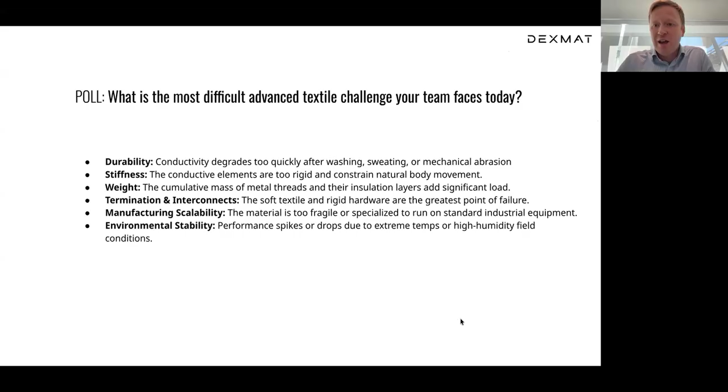Weight, the cumulative mass of metal threads and their insulation layers adds a significant load. Termination and interconnects, the soft textile and rigid hardware are the greatest points of failure. Manufacturing scalability. The material is too fragile or specialized to run on standard industrial equipment. Or environmental stability. Performance spikes or drops due to extreme temperatures or high humidity field conditions. So please take a moment to answer that question, and we can move on to the next slide.

So all those issues that we mentioned in the poll question are things that we think could be addressed by deploying Galvorn in these type of textile applications. Galvorn is a material that has an extraordinary combination of properties that is unmatched by any other material. Its electrical resistivity is 10 times lower than the best silver-coated nylon yarns, while at the same time having 17% higher thermal conductivity than copper at a tenth of the density of stainless steel, making it a very lightweight material. At the same time, Galvorn behaves just as any other cotton or textile thread and is 1,000 times more flexible than metal wiring.

And coupled with all this is extremely high strength, where Galvorn is comparable in strength to materials like Kevlar. It's also highly corrosion resistant, flame resistant, cut resistant, and it's recyclable, meaning we can take Galvorn that's been used and put it back in our process and make it into Galvorn with no loss of properties. Next slide.

DexMat has a highly scalable process for making Galvorn. The way this process works is we take raw carbon nanotubes, which come in a pelletized or powder format, and we dissolve the carbon nanotubes in a solvent. At very high concentrations, when we make a carbon nanotube solution, it forms a liquid crystalline phase, which basically means that the carbon nanotubes start to spontaneously orient and pack together with one another. And what you end up having is a polydomain liquid crystal.

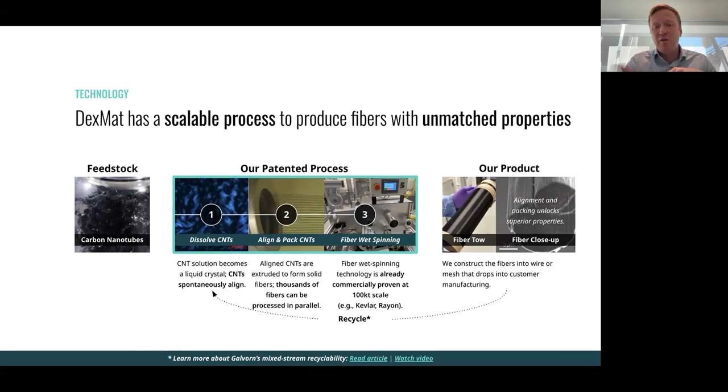As I mentioned, we end up getting a very densely packed fiber. You can see in the image on the right, a scanning electron microscopy image, the dense packing of the carbon nanotubes in that fiber. And as I mentioned earlier, we can take the fibers after they've reached end of life, put them back into our solvent in step 1 of the process, and recycle them to make Galvorn again with no loss of properties. Next slide.

Here, what we are showing you is just a portion of our production line, the collection point of the fibers. We can't show you the entire machine because it has some proprietary information, but this shows you the speed at which we are able to collect our fibers, which is actually faster than the production speeds used for things like PAN carbon fiber precursors. And if you go to the next slide.

Since we first started making Galvorn, we've increased our production capacity by a factor of 3000x while reducing costs by 99.6%. Today we're still at a relatively small annual production capacity of about 1/3 of a ton per year. However, because we have such a lightweight material, this translates to a pretty significant length of conductive thread: about 18 million meters of thread, about 150 microns in diameter, from this 300 kilogram per year capacity.

However, our goal is to get Galvorn produced in large volumes and at very low costs, on par with commodity materials like copper, aluminum, and steel. So we have an aggressive scale-up plan where later this year we're going to 10x our capacity and produce Galvorn at about 3 tons per year. Within the next 5 years, we anticipate building our first-of-a-kind commercial plant, which will enable us to produce about 3,000 tons of Galvorn in a single year. That translates to about 180 billion meters of 150 micron Galvorn thread.

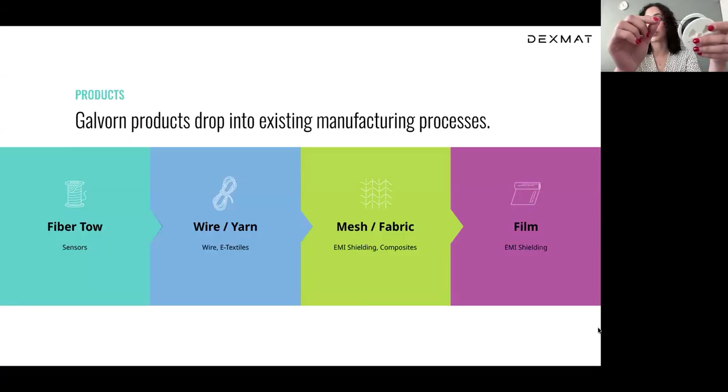We start with a fiber tow, which is the end product of the fiber spinning line that Dmitri described earlier. These are continuous single filaments that run parallel to each other, ranging from 30 microns to about 50 microns in diameter. Those are the ones we readily have available, but we can make them thinner or larger in diameter depending on what the application calls for. And we can take these loose tows and twist them to form twisted or braided yarns. This is about 0.5 millimeter in diameter.

We can make all the way from 17 tex to hundreds of tex in yarn. And the great thing about our yarns is that they can drop into existing manufacturing processes and equipment such as sewing machines, embroidery machines, knitting machines. And although they're not as stretchy as other typical textile yarns, they can still run very efficiently on these machines.

And I have 2 samples of some of these knitted meshes or fabrics. And the great thing that you can see here is that you can manipulate the physical properties of these fabrics. As you can see, this one is a lot more flexible and supple to the touch, and this one is a lot stiffer and more rigid. We can achieve this by either playing around with the construction of the fabric or playing around with the construction of the yarn. And we can also target any type of specifications with our yarns to reach a specific linear resistance based on what the application calls for.

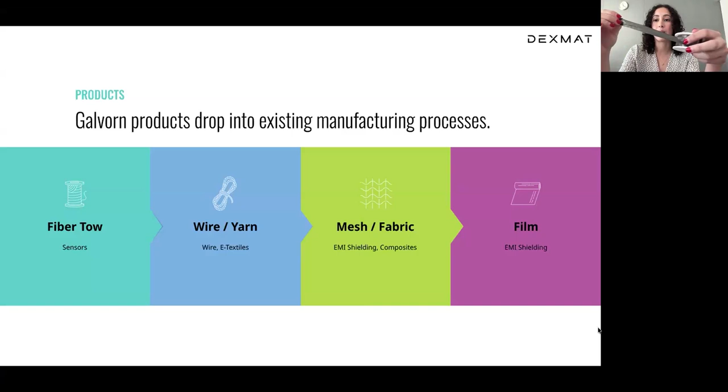And lastly, we have this ribbon-like, highly aligned film. We call it film or tape. This is still very flexible and very strong and electrically conductive. It's about 10 to 20 microns in thickness, and typically we make them in 1 to 2 centimeter widths, but we can go wider or narrower, depending, again, on what the application calls for.

So I'm going to cover some of the prototypes that we've developed at DexMat. This one was actually through a project that was sponsored by AFFOA in partnership with a company called Hexoskin. They make EKG vests and t-shirts, and they typically use these silver-coated fabrics that after multiple washes start to oxidize, and you get a degradation in the EKG signal. So the goal of the project was to assess whether Galvorn-based electrodes would have comparable performance in terms of EKG signal while also having that washing durability. And by the end of the project, we were able to prove that it does indeed provide reliable EKG signal while also holding up to multiple wash cycles without a degradation in performance.

Looks like we may have lost Sophia for a second. I think she may have gotten booted off the internet network, so I can continue talking through the slides while she tries to join back on.

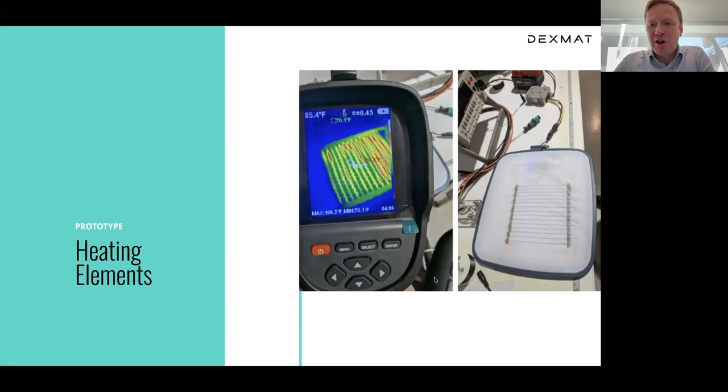So essentially, this is an application that can be used for heated jackets, car seats, etc., and requires a very small quantity of Galvorn to be able to generate the amount of heat that you would need for that application.

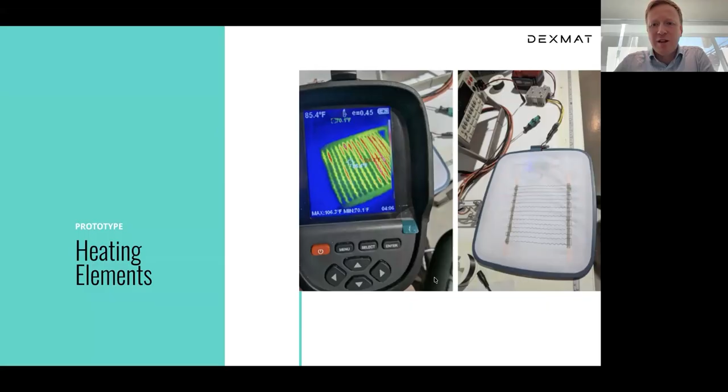You want to go to the next slide? I don't know if we can since Sophia's not there. Yeah, she was in control. I can share my screen. Sorry about the technical difficulties. One moment, I do have a backup deck. One moment, please. Can everyone see this one? Yes.

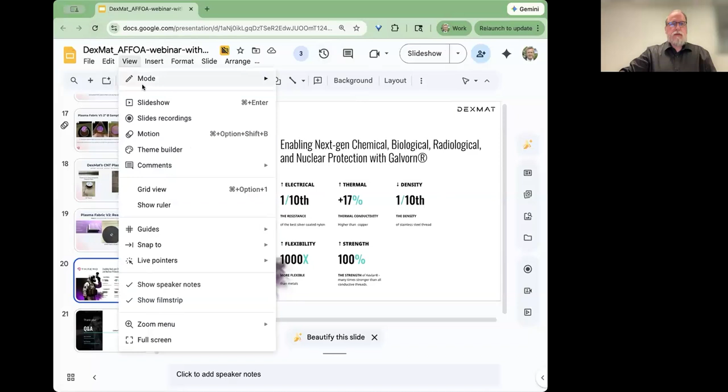Another application that is possible with Galvorn is based on the fabric form factor that Sophia demonstrated. And there's a wide range of different applications that are possible with this fabric form factor. One that customers have been pursuing is EMI shielding and signature management. And it looks like Sophia is back, so I'll pass the baton back to her, but I'll finish on the signature management. Essentially, if you have a vehicle that you're trying to hide in the field, or camouflage that you're trying to have on the soldier for protecting from being detected by radar, having a material that is able to shield from electromagnetic signals that is lightweight is highly important.

And is there anything else, Sophia, that you want to specifically mention around the signature management? Sorry about that. I think I lost connection for a minute, but no, I think you've covered it. Thank you for stepping in. Are you sharing right now? I am, yeah. Okay, just continue sharing. We'll move through the slides.

Another application that our customers are testing Galvorn for is lightning strike protection. Typically, traditional aircraft is made with aluminum, and of course, aluminum is a great conductor, so it can just absorb that strike and channel the current out through an exit point. However, more modern aircraft is being built with carbon fiber reinforced polymers, and carbon fiber is a poor conductor, so you do need an additional metal layer that can absorb and mitigate that lightning.

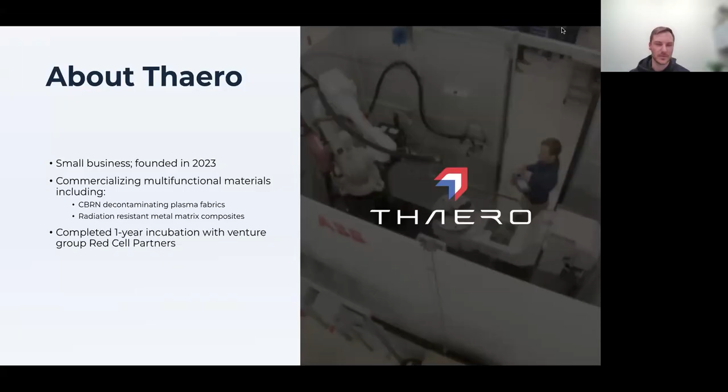And also they're not reusable. So you wear them once, and whether or not you're involved with some sort of chemical, biological, or radiation agent, you have to dispose of it. So the cost can add up very quickly. So yeah, that was a brief intro into the challenge that we're addressing here at Thaero. And if we move to the next slide, I'll talk a little bit more about the key challenges that we wanted to address.

So one is we wanted to make this modular. So it is a layered composite. And the one that I'm going to be talking about today is the outer layer, which is our active plasma fabric. With that we're trying to overcome passive barrier limitations in current PPE suits. As I mentioned before, generally you just want to keep the chemical or biological agent out. That's been the entire concept for traditional suits, but we wanted to take a more active approach and allow the warfighter or equipment to go into the environment and actively decontaminate against these agents.

We also wanted to enhance the multifunctionality of these suits. Generally you'll have suits for the different environments, but sometimes you don't know what you're walking into. So we wanted to make sure that the next generation of suits is able to decontaminate or protect the warfighter from all of these different problems.

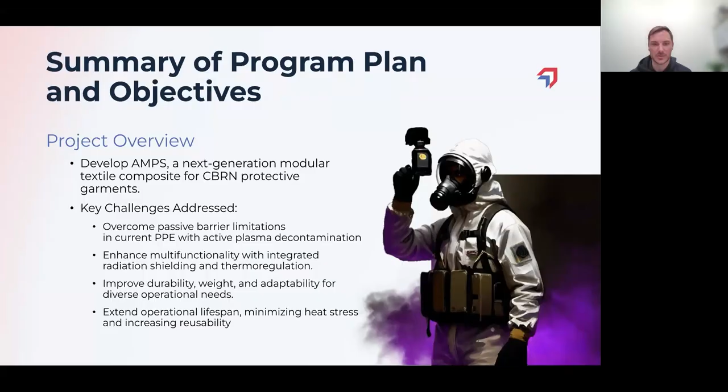And we wanted to make sure that while we do this, we don't add too much weight. We want to make sure that they're durable. Again, we're going for reusability. So this needs to be something that can go through multiple cycles, which is also going to eventually reduce the overall cost of the suit. If we go to the next slide.

So for the outside layer, I mentioned this plasma fabric. Basically, we're able to run an electric current through the outer fabric system, and we're able to create basically a dielectric breakdown barrier. And this comes as this kind of glowing purple plasma that you see here. Now it is a relatively cold plasma, so the overall composite itself never really goes above 100 degrees Celsius.

And by doing this at different voltages or different resonant frequencies, we're able to tune the plasma fabric to give enough power to actively decontaminate against known chemical and biological agents. So this here is basically our version 1, very basic. The base metal here is copper, but as we know, copper is very heavy. It's going to oxidize over time, even at these lower temperatures. And the basic parallel layer here is not very flexible. So if we want to go to the next slide, please.

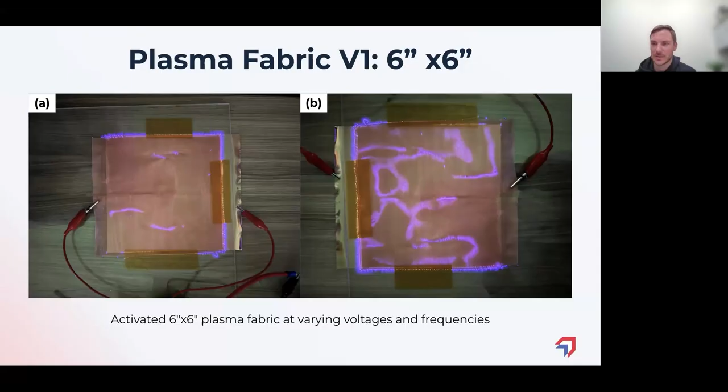But if you're in an active war zone, you don't really want to be glowing giant purple. And the sound is off here, but it also makes a high-pitched noise. So they'd be able to see you, hear you, and that wasn't great as well. So along with the stiffness of the fabric, being prone to oxidation, hard to integrate with traditional layers, and this glowing and sound that comes with it, we wanted to move to something that had higher strength, was more lightweight, more flexible, and solved a lot of these challenges.

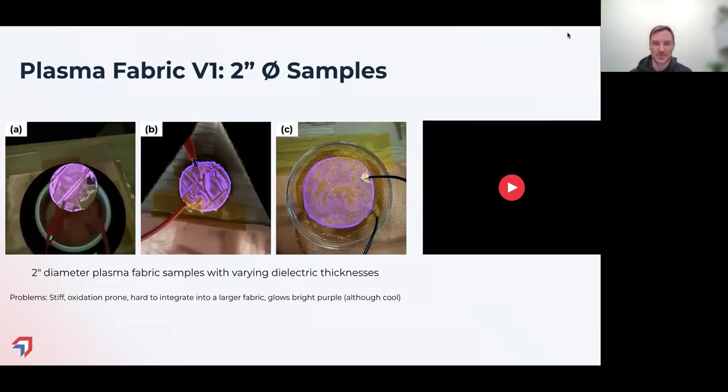And that's actually what led us to DexMat in the first place. So I had seen their different Galvorn videos on LinkedIn. That was how we initially found them. And I thought it was a great technology. And I was dying to integrate it into some of the different technologies that we've been working on over the years. And this was definitely a great opportunity for us to work together. So if we go to the next slide.

So working with them, we were able to transition this plasma fabric to something that was not just parallel or a sheet form. We were able to make this coaxial design. So we had this design in our heads, but we just didn't know exactly how we were going to integrate it. But being able to work with them and introduce the Galvorn, which is not only flexible, but it's actually conductive, we're able to basically make an activated plasma fiber with this technology.

So by introducing Galvorn, we were able to make everything lightweight. It had a much higher strength than the copper. It's also cut resistant and high temperature resistant. So being able to put this on the outside of our fabric layers was able to protect the warfighter from other threats, basically from that cut resistance. I think you guys have looked at some bullet resistance. I'm not sure how far that's gone yet, but eventually that would be something great to integrate as well. Being able to make our suit as high strength as possible while being able to actively decontaminate.

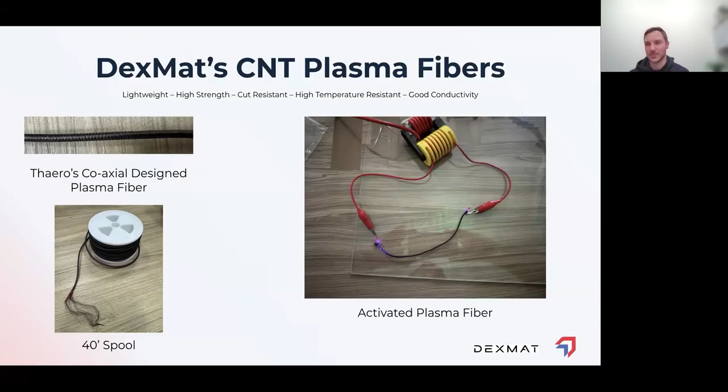So the outside is this cold plasma fabric. Underneath that is our radiation shielding layer. And then below that is some EMI shielding as well. And then the final layer, which is closest to the warfighter, is for thermal regulation.

And that's using a phase change composite. So basically, whether it's hot or cold, we're able to keep the temperature regulation. So this was in that 2-inch diameter form factor, and that was allowing us to send off samples both to Battelle, which was going to do the chemical and biological testing, as well as to NASA, where they were going to do the neutron radiation shielding.

So really the next stage is being able to transition this not only to some kind of small R&D project, but we actually want to take this larger and make these more flexible knitted swatches like Sophia had shown before. We want to be able to transition this into decontamination bags or decontamination blankets. And then eventually going towards a more full-fledged suit that the warfighter could use.